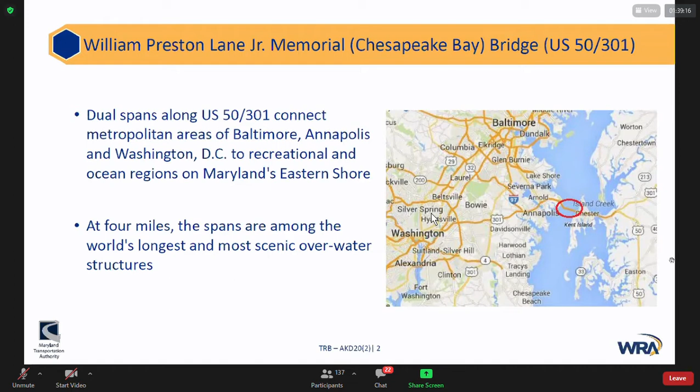Okay, thank you. I'll be presenting today on the Chesapeake Bay Bridge crossover automated lane closure system, the ALCS. Just to give you some background for the William Preston Lane Jr. Memorial Bridge, referred to as the Chesapeake Bay Bridge. These are dual spans that are along US Route 50/301 that connect the metro areas of Baltimore, Annapolis, and DC to Maryland's Eastern Shore. At 4 miles, these spans are among the world's longest and most scenic overwater structures.

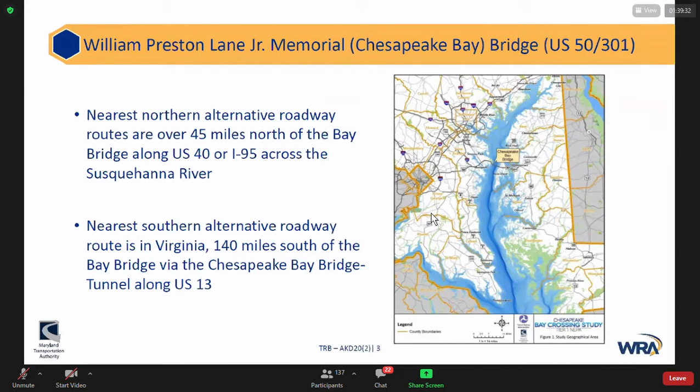To give you an idea of the importance of this critical link in the regional transportation network, the closest northern alternative roadway route is 45 miles to the north, and the southernmost is 140 miles to the south. So this is a critical link in the regional transportation network. The original span was opened in 1952 and provides a 2-lane roadway typically for eastbound traffic. The parallel structure was opened in 1973 and typically provides for 3 lanes of westbound traffic.

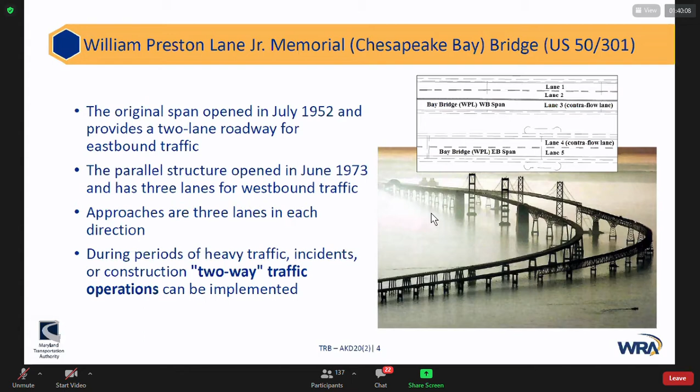It should be noted that the approaches on each side are 3 lanes in each direction. So the 6 lanes that are provided on the approaches have to go across 5 lanes on the bridge, which then causes, during periods of heavy traffic, incidents and construction, that 2-way traffic operations can be implemented on one of the spans. So this really set up the purpose and need for this project. The Maryland Transportation Authority Police requested a system that would decrease lane closure and contraflow setup time, decrease incident response time, and provide for a safer environment.

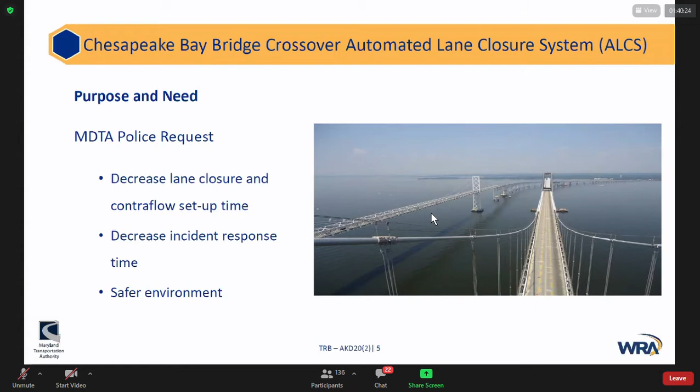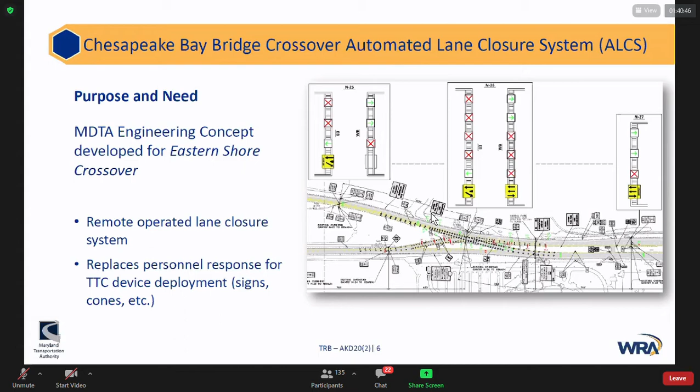In order to further this purpose and need, Maryland Transportation Authority Engineering, Office of Engineering and Construction developed a concept for the Eastern Shore crossover. This concept was conceived as a remote operated lane closure system, and this would replace personnel response for the deployment of temporary traffic control devices, signs, cones, etc.

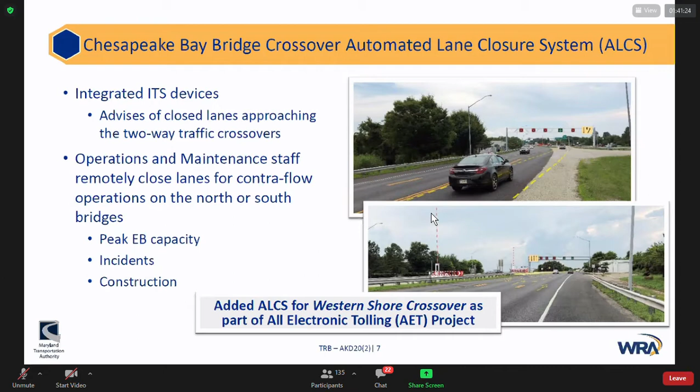So the ALCS system is an integrated ITS system of devices that advises of closed lanes approaching the 2-way traffic crossovers that allows MDTA operations and maintenance staff to remotely close these lanes for contraflow operations on either the north or the south bridges to address peak eastbound capacity, incidents, and construction. It should be noted as we started this project, we were only working on the Eastern Shore crossover, but subsequently we also added an ALCS system for the Western Shore crossover that's going to be implemented as part of an all-electronic tolling project.

Some of the ALCS ITS elements that are critical for implementing this system include enhanced lane use signals, DMS signs for ALCS warning messages, and then really one of the critical elements are the variable arm length horizontal swing gates, which help to remotely close these lanes to avoid the personnel response to move cones for lane closures, as well as illuminated pavement markers to guide drivers through the crossover movements.

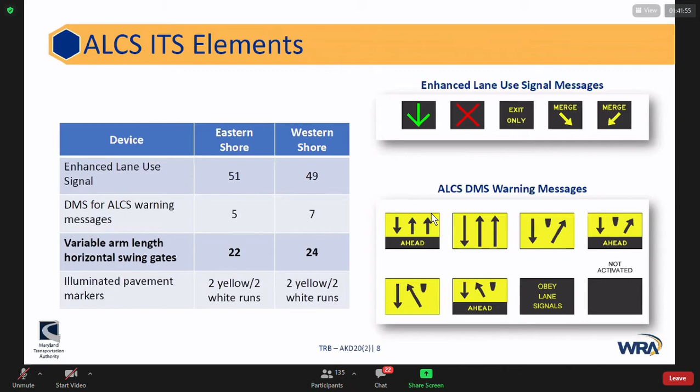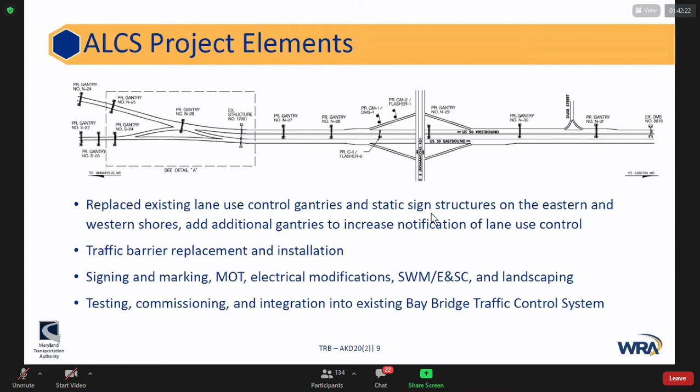In addition, there were other project elements. We replaced all the lane use control gantries and static sign structures on the eastern and western shores, as well as adding additional gantries to increase notification of lane use control. Traffic barrier replacement and installation, signing, marking, maintenance of traffic, electrical modification, stormwater management, erosion and sediment control, and landscaping, as well as testing and commissioning of the system with integration into the existing Bay Bridge traffic control system.

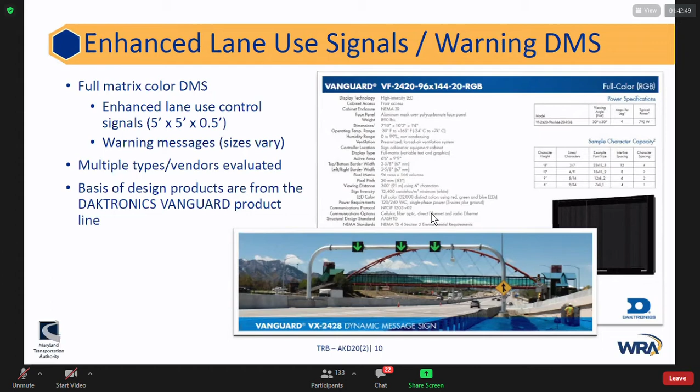So the enhanced lane use signals and the warning DMS as part of the ALCS are full matrix color DMSs. The lane use control signals are typically 5 feet by 5 feet by 6 inches thick. The warning message DMSs vary in size. Multiple types and vendors were evaluated during the design process, and ultimately the basis of design products that were selected are from Daktronics' Vanguard product line.

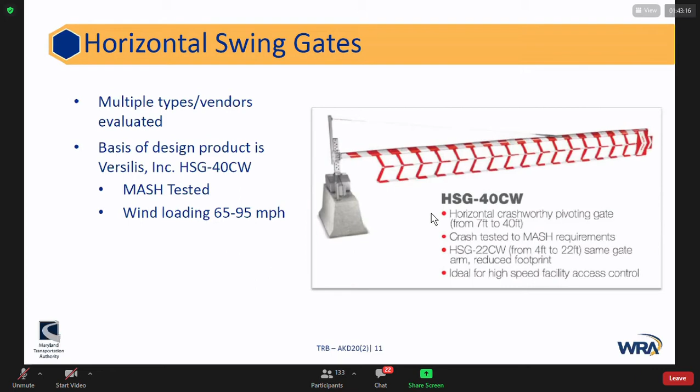The next element of the ALCS is the horizontal swing gates. Multiple types and vendors were evaluated during design. We looked at both vertical and horizontal swing gates, and we looked at crashworthiness, we looked at wind loading. Ultimately, Versilis's horizontal swing gate product, which provides for a MASH-tested product and wind loading up to 95 miles an hour, proved to be the basis of design product for this project.

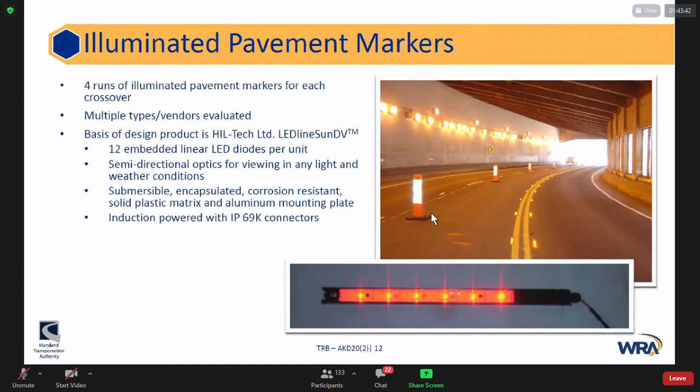The last ITS element is the illuminated pavement markers. There's 4 runs of the IPMs for each crossover. Multiple types and vendors were evaluated. The basis of design product was the HIL-Tech Limited LEDlineSunDV. This provides for a fully submersible, encapsulated, and corrosion-resistant product to guide drivers through the crossovers when they're activated.

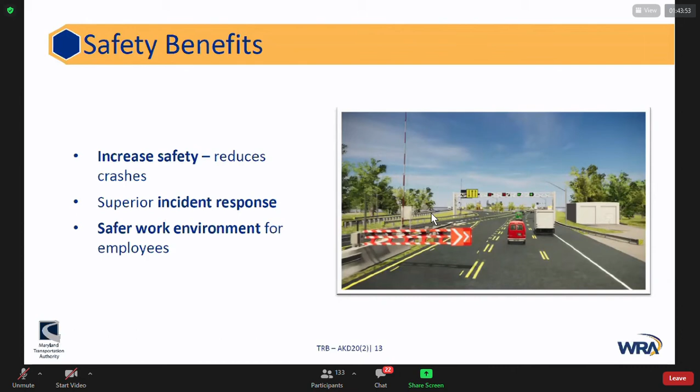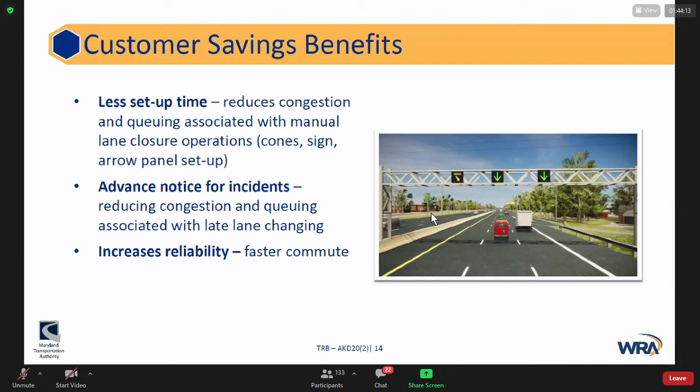The safety benefits that are expected from this project include increasing safety by reducing crashes, providing for superior incident response, and a safer work environment for employees. This should provide additional benefits to customers for savings of less setup time, which should reduce congestion and queuing that are associated today with the manual lane closure operations, provide advance notice for incidents to reduce congestion and queuing associated with late lane changing, and increasing the reliability for commuters.

Operational benefits are expected to include freeing up time for maintenance personnel to perform other routine facility maintenance activities, as well as reducing their setup time for lane closures for two-way operations.

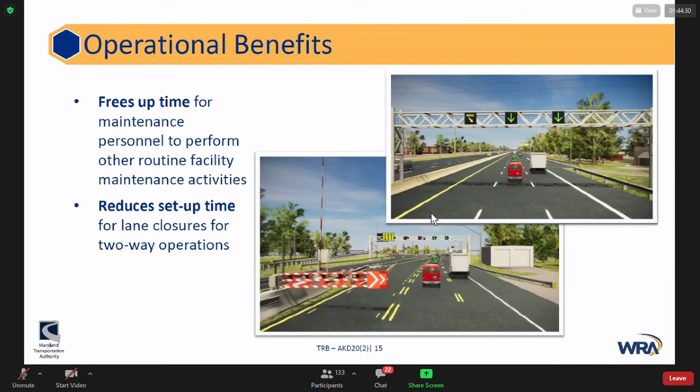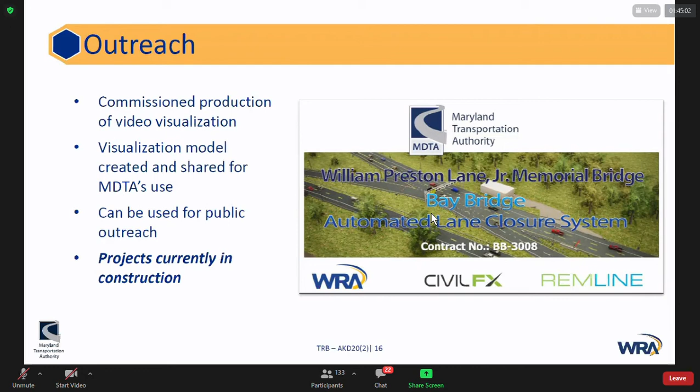As this was a new system in Maryland, there was the desire to make sure that outreach was provided as part of the project. MDTA commissioned production of video visualization. As part of the video visualization model, they also created a model for MDTA's use to actually pan and view and zoom in throughout the actual project limits. It can be used for public outreach as well as for presentations to senior management staff. Both the Eastern and Western Shore projects are currently in construction.

These videos depicted the four main operations plans, and operations plan A is two-way traffic on the westbound bridge with normal traffic on the eastbound bridge. This is a typical operations plan during heavy eastbound traffic in the PM peak period. Operations plan B is a westbound north bridge closure with two-way traffic on the eastbound bridge. And then operations plan C and D are various lane closure operations on the westbound bridge.

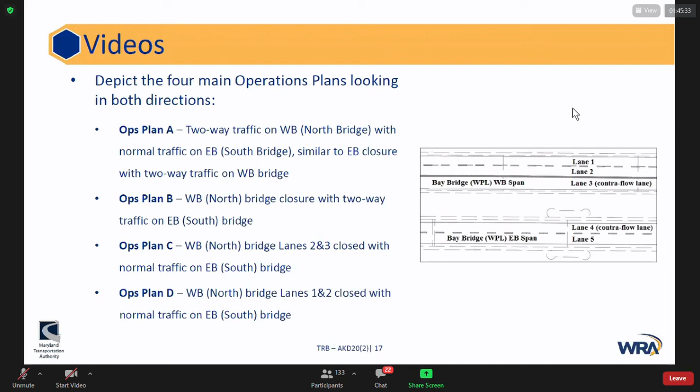With that, I'm going to try to share a video, a sample of the video that was developed. So this is starting with operations plan A as captioned.

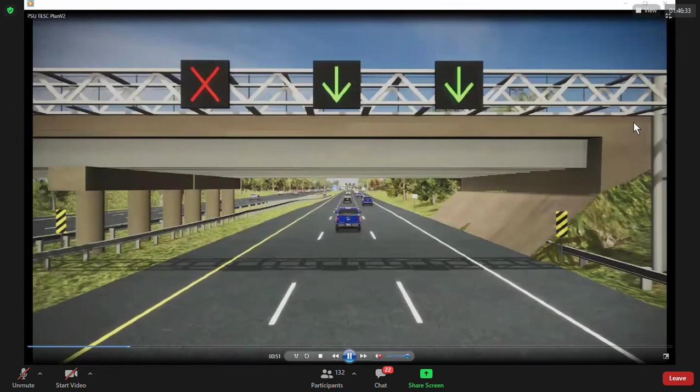I see that the video is still quite long. Do you think we can maybe shrink it because we're really late with our timing? I can, if you let it go for a little bit more, Francesca, I can cut it off. I won't let it go for the full. Let it get through this. That would be great. Thank you very much. Sure.

So actually in this view here, you're starting to see the gates that actually appear on the left as part of this operations plan, where the left lane is closed to allow traffic to enter from the opposite direction. You can see them starting to enter the crossover. And so that's the Eastern Shore crossover there, where you see traffic crossing back over from the North Bridge.